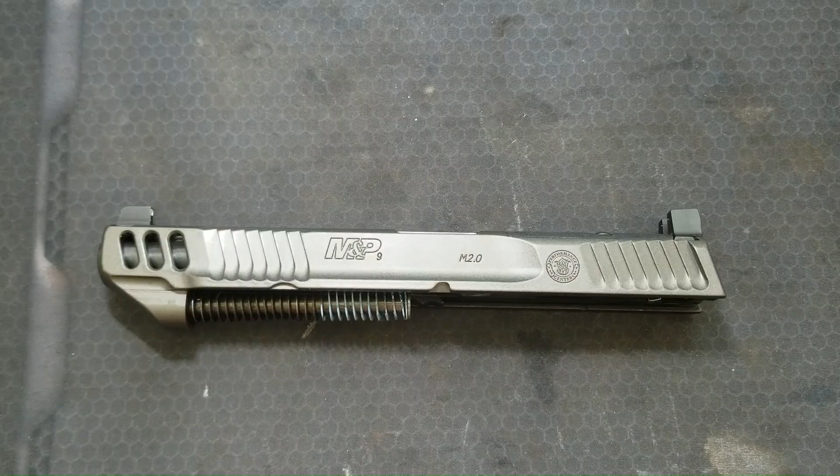Since I've been porting pistol barrels, my buddies who are into guns naturally want some barrels ported. That makes sense to me, I'm happy to do it. I enjoy the design work and the machining process. My buddy has this Smith & Wesson Performance Center Competitor.

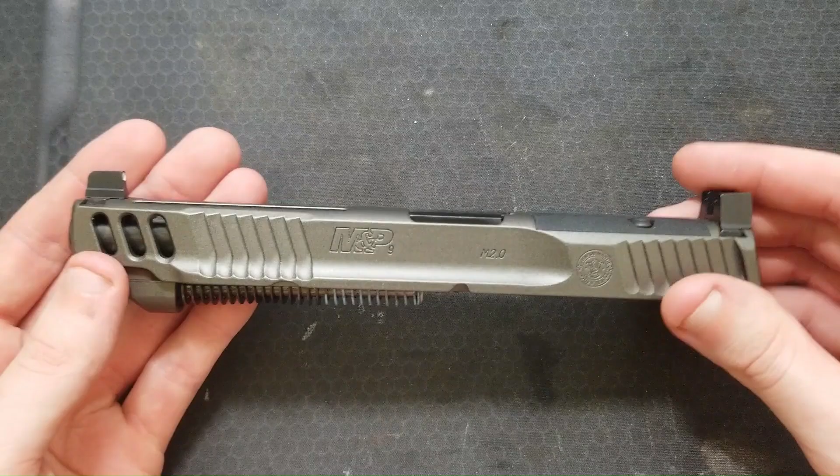I only have the slide and the barrel because he lives a couple hundred miles away and we didn't want to deal with sending the whole gun through an FFL.

I think these are super cool guns. I really like the M&P series in general. This one strikes me as a great candidate for barrel porting because it's clearly a performance-oriented pistol. It has all these cool lightening cuts in the slide. I don't know why Smith didn't port these from the factory like some of their other Performance Center offerings. Maybe they had a specific competitive class in mind and ports would push it out of that class. I don't know, I don't compete.

Unfortunately, I can't shoot it and do the comparative testing like I normally do with my pistols. Well, I guess I could have, but I don't really have the time and I wanted to get the slide and barrel back to my friend as soon as possible.

Although, this is a sick color combination. Dude, Smith & Wesson, hook it up. This is dope. Anyways, sorry, no shooting footage.

I'm just going to discuss my design for the ports and give some detail regarding the machining process.

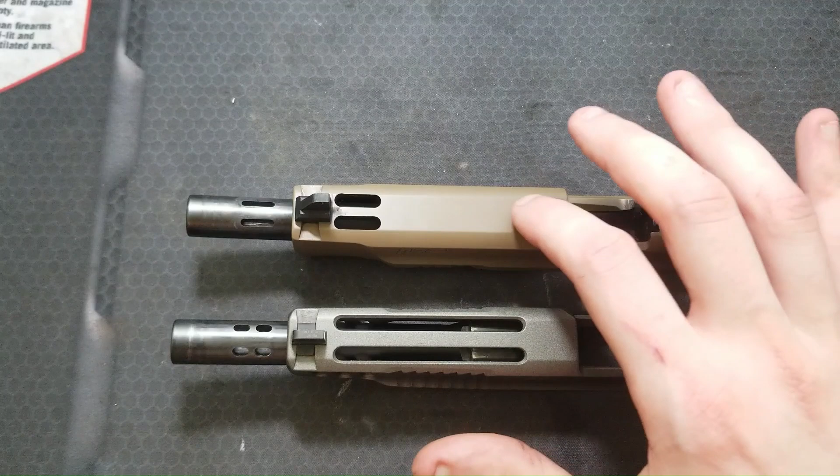I did the design work for this pistol and my personal M&P 5-inch in tandem. I've already put out a video about porting this pistol, so check that out if you're interested. The performance of this competitor should be really similar to my M&P 5-inch. The designs are slightly different, but they have the same overall port cross-sectional area, V angle, and position in the barrel.

We looked around and only saw one company porting these pistols. I won't name the company, but I don't really understand their design. In my opinion, to increase performance of the pistol and decrease time to get back onto target, we want to decrease muzzle flip as much as possible.

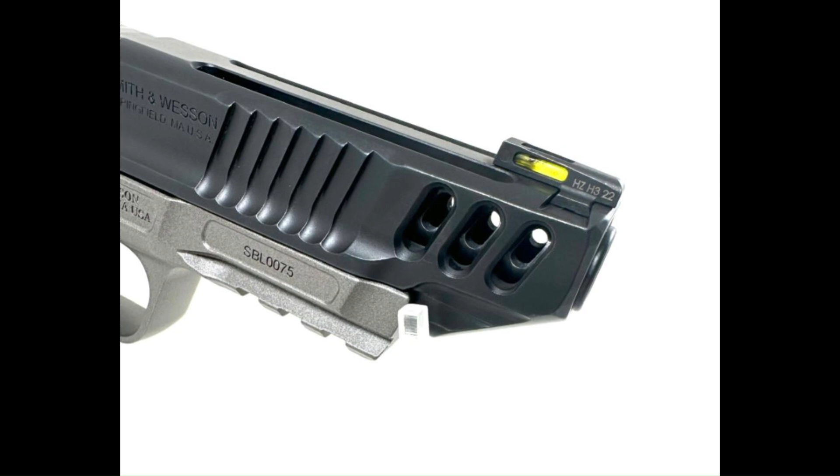This design has ports in the barrel that match the factory cuts in the slide. These look like they're crowded towards the top of the barrel a little, but will primarily be directing gas sideways. It will act as a muzzle brake and may help reduce recoil some, but I doubt these would do much for muzzle flip or the overall performance of the gun.

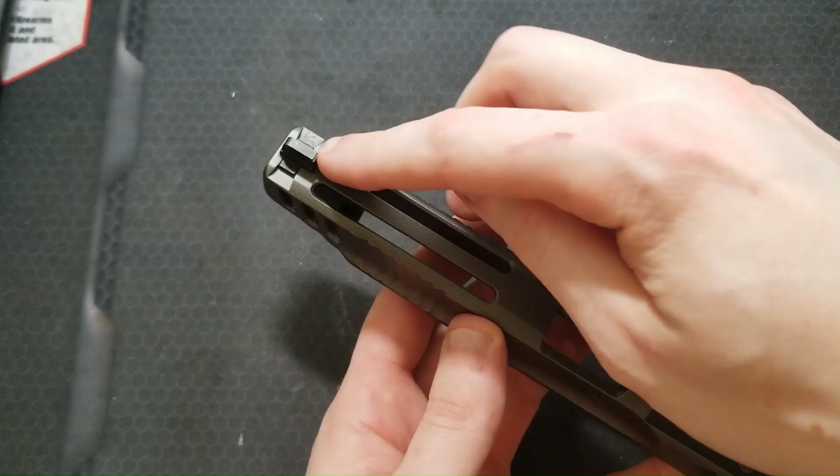This slide has these nice long slots all the way along the top, and we both figured it would make the most sense to sneak some ports in there. This also meant I only needed to machine the barrel, obviously, and not the slide.

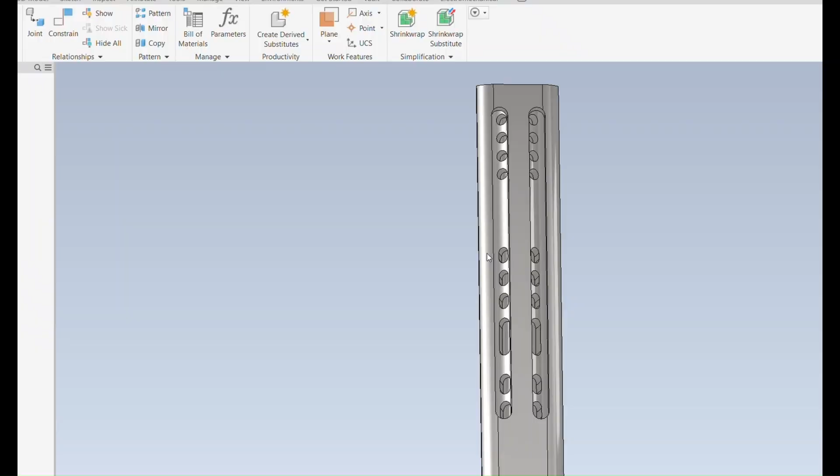I had him take some measurements of the barrel and slide before he sent them to me, so I could come up with a rough 3D model to start visualizing how I can get the ports in the barrel lined up with these slots. I wanted to see if I could sneak the ports in through the slots vertically, but there wasn't enough room for that, so next I projected some geometry and made a sketch to get an idea of the angle I needed.

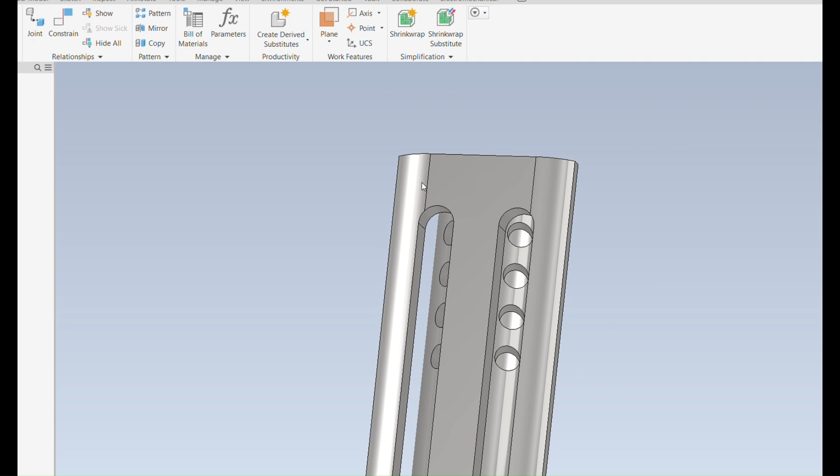It ended up being about 15 degrees. I then came up with some different designs based on my targeted total cross-sectional area of the ports. I sent him pictures of the designs and let him pick which one he wanted. He's a man with good taste, so he picked the same one I would have: 2 slots on either side of the barrel.

I think the shape of the slots will complement the other cuts in the slide nicely. I didn't have much space to sneak ports in through the lightening cuts on the top of the slide. Using my 3D model, I found I couldn't even get 1/8 of an inch of width in there without the slide material overhanging the ports and possibly blocking gas flow.

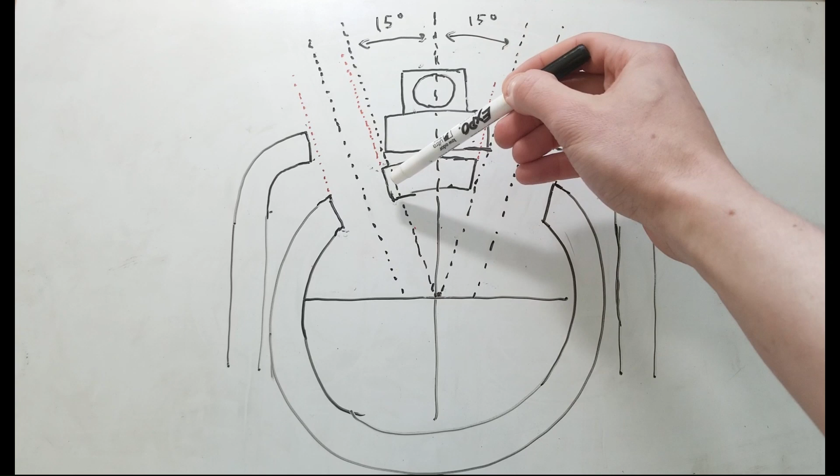7/64 of an inch looked good, but it was very tight, so in case that still interfered, I modeled another set of ports with a 3/32 inch diameter and went with 3 ports on either side for a total of 6, instead of 2 on either side for a total of 4, to maintain the cross-sectional area I wanted.

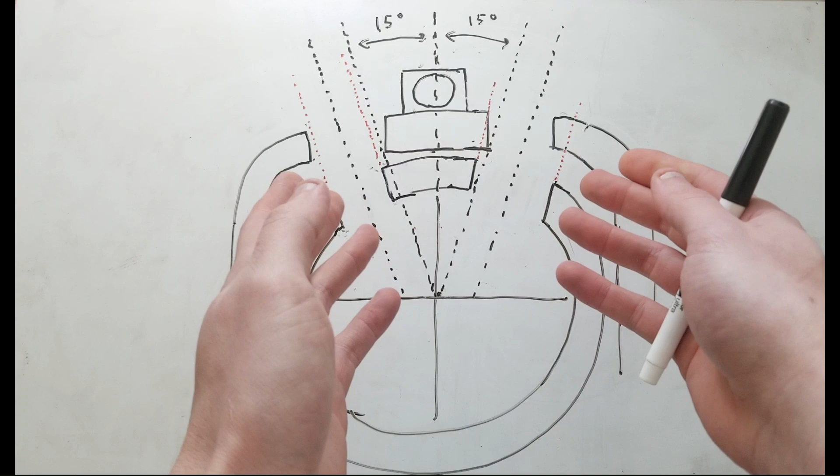I was pretty pleased that the angle ended up only being about 15 degrees off the vertical, as that will still direct most of the gases upwards to counteract muzzle flip.

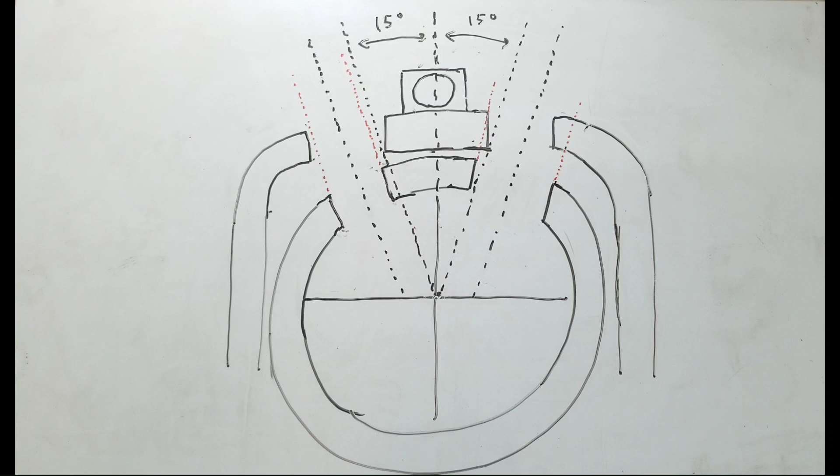You can see here that the ports are at a 15-degree angle with respect to the top of the slide, but the center axis of the ports does not line up with the center axis of the bore. I had to offset them towards the outside to get them in the position I needed within the slots. This will complicate my machining a bit.

The V angle and offset from the center may also help keep carbon off the front sight, but he runs a red dot and irons don't even co-witness through the window, so he's not using his irons anyways.

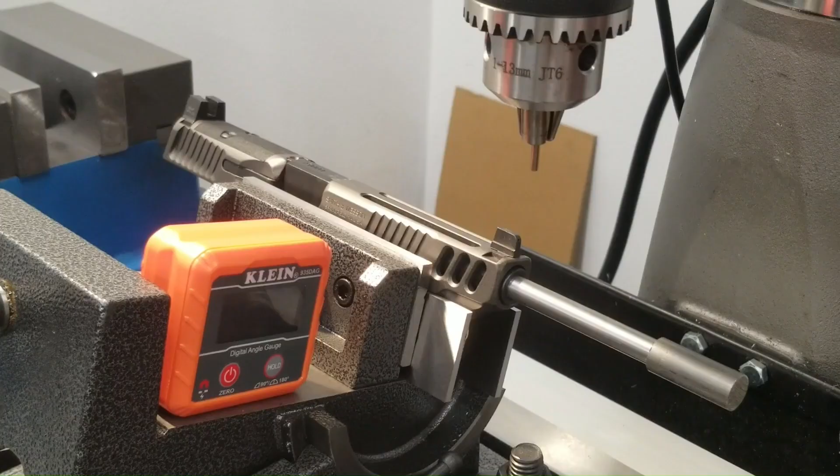Once I got the barrel and slide in hand, I confirmed all the measurements I used to create my 3D model. To confirm what size end mill to use, whether it was 7/64 or 3/32, I mounted the slide and barrel together in my tilting vise.

I set my 15-degree angle, then put a 7/64 drill bit upside down in the chuck. I played with the position until I got the bit centered in the slot to see if there would be interference with any edges. At the same time, I had zeroed my y-axis on the center of the barrel and dialed in the offset I calculated in my 3D model to check if that offset from the bore axis was in the right range.

7/64 of an inch diameter was going to work just fine and sneak in there without interfering with the edges of the slots in the slide at all.

I have already gone over the machining steps and process for ports in a V configuration that are also offset from the central bore axis in past videos. This barrel is no different, so I won't include that information here.

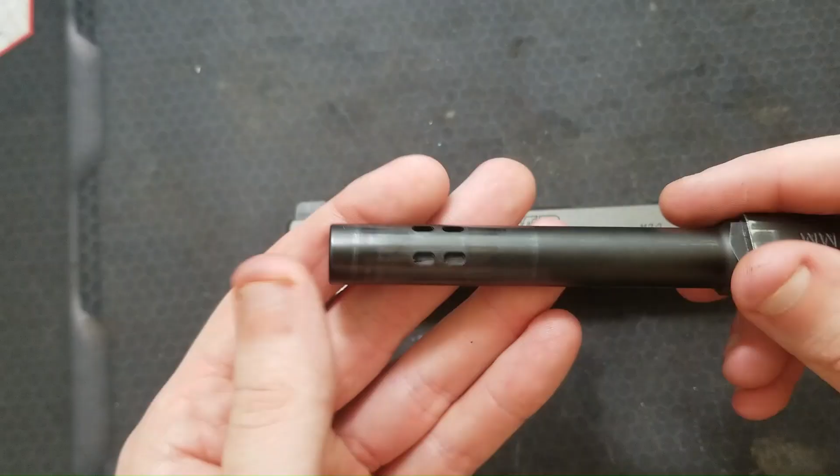I deburred and broke the edges of the slots from the top with a very fine needle file and ceramic stones. I deburred the bore with some 600 grit sandpaper wrapped around a small rod like I normally do.

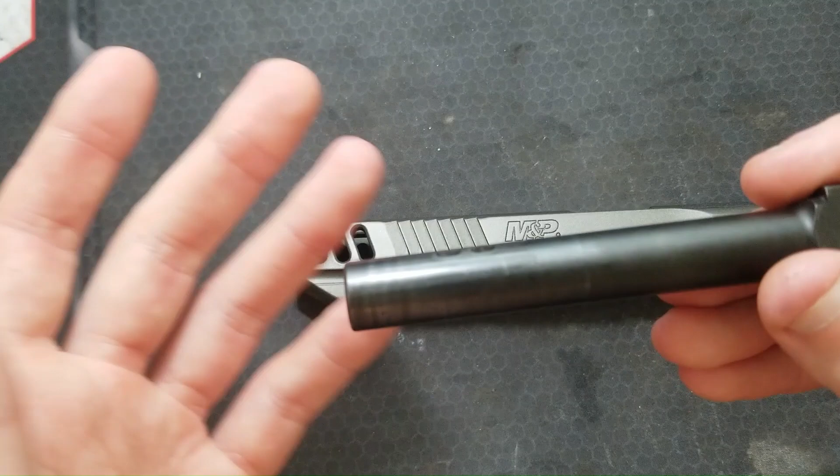The refinish on this barrel came out nice. It's a 400 series stainless steel, which is easy to blacken up with the right chemicals and process.

So that wraps up the porting job on this Smith & Wesson M&P Performance Center Competitor. I wanted to make a short video showing my port design, as there doesn't seem to be a lot of options out there for this pistol yet.

This is just one way the factory slide cuts could be used to sneak some ports into the barrel. I'm very pleased with how it came out and how it looks.

I think this gun is a prime candidate for porting, and I'm glad my buddy wanted to have it done. It's cool that he was willing to let me do the design and machine work. It was a really fun project. I'll get to shoot it at some point too.

I did recommend that he installs a 13-pound recoil spring, as that's what functioned best after I ported my 5-inch M&P. So let me know what you think of this gun and the porting work.